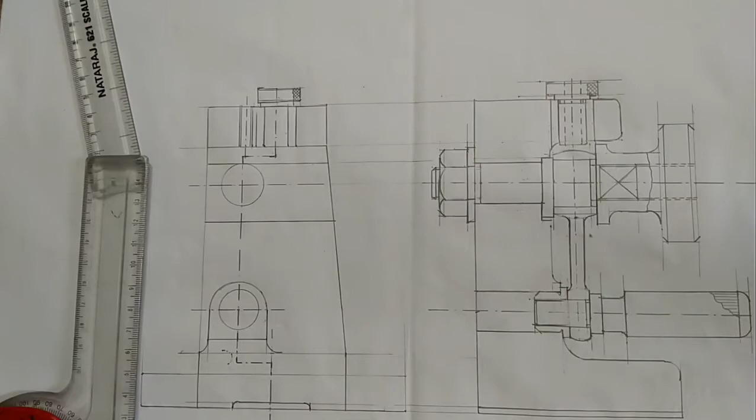Next, I am going to insert part number 9 in this hole. So we know that this threaded portion is M6, 6 mm diameter. Here also you can see M6. So we can insert up to this point in this hole. So the total distance was given 10 mm. I am marking 10 mm here.

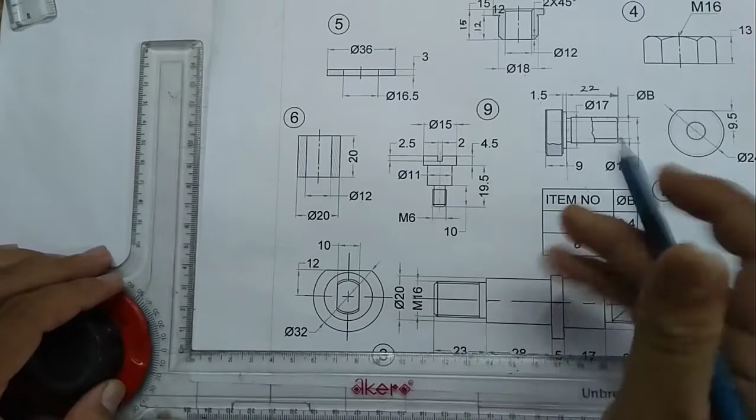So here you can see a line, the distance was not given. So I am choosing my own. Next, from this to this end, the height was given 19.5. 19.5, it's coming here. And this distance was given 11. So marking 5.5, 5.5.

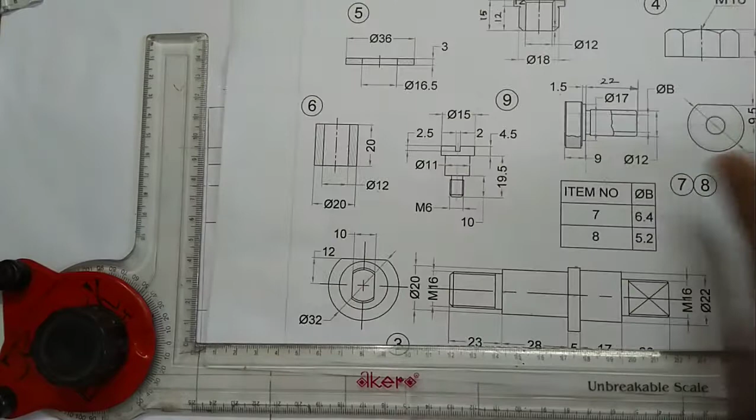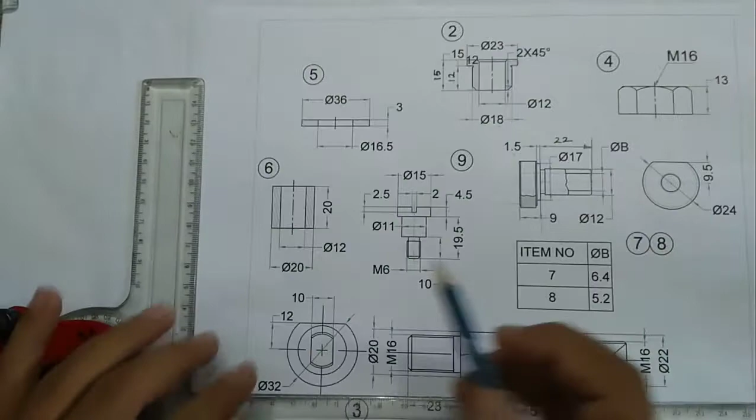Then this head, the thickness of this head is 4.5 mm. And the diameter of head is 15 mm. From here I am marking 7.5. And from here 7.5.

You can see a cut here. The gap is 2 mm. And the depth is 2.5 mm. So that's all, we have completed these parts. And the next thing is you have to assemble the job. This one is the job.

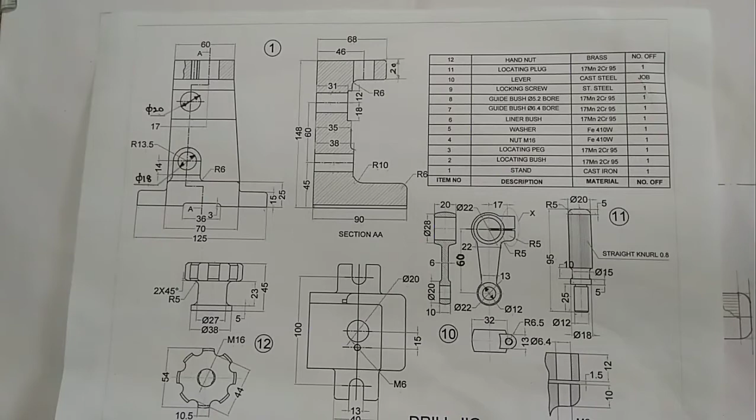Then the inner circle diameter is 22. So I am using pro circle. This one is a 20 mm diameter circle and this one is a 22 mm diameter circle.

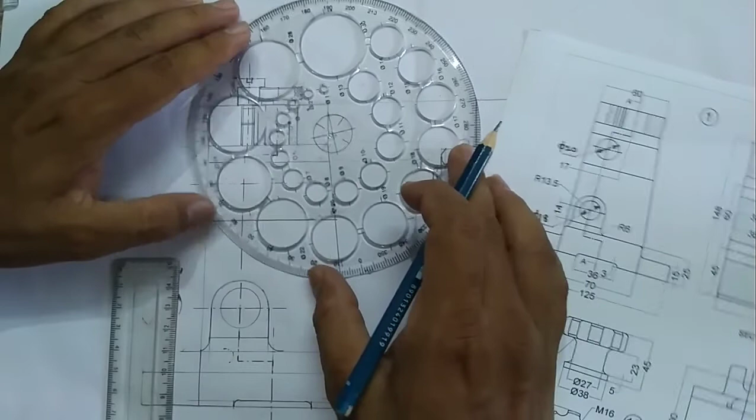Next we have to draw this outer circle whose diameter was given here 32. Measure 16 mm and draw the outer circle.

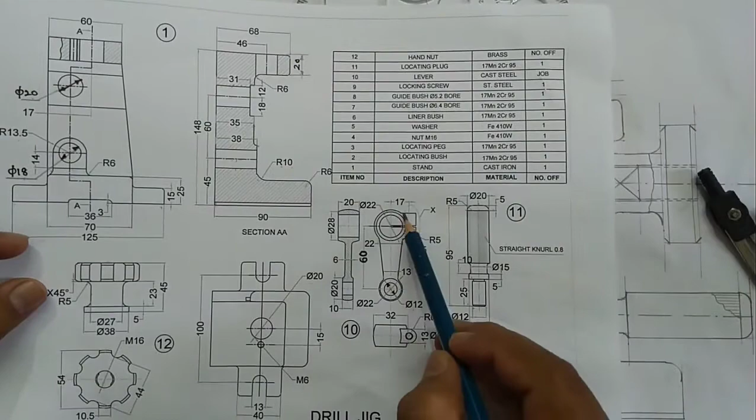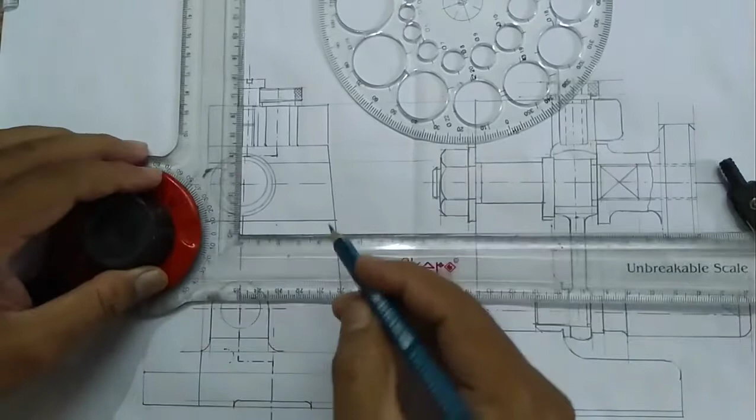Then this line I am going to draw. Before that I am going to draw the center line. So here you can see the center line. The gap between these two center lines is 17 mm. So this center line will exactly match with this one. And here you can see two small lines. The gap between these two small lines was given. This diagram is completely given here, zoomed.

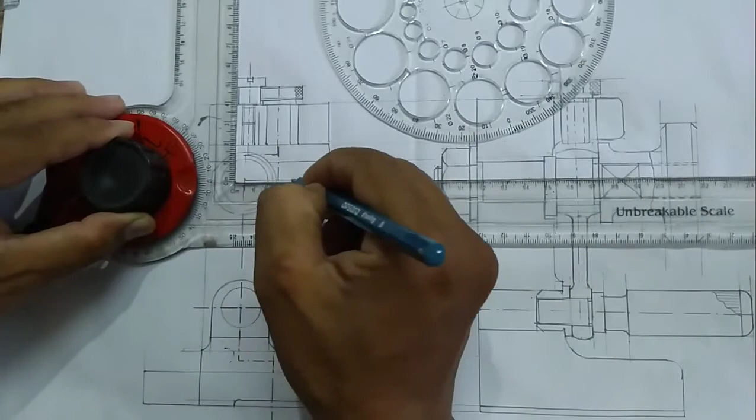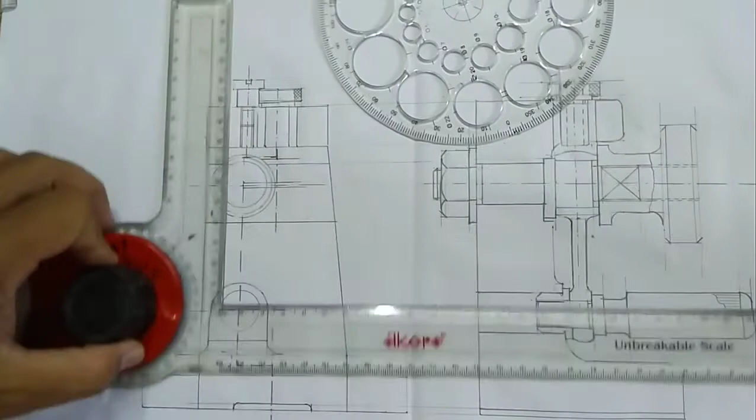And from this line the height is 12 mm. And this end of the line is 10 mm below this line.

And here you can see I have to find this distance, the distance between the center line and this edge. For that I have to use the top view. The radius of this outer circle was given 6.5, which means this distance will be 6.5.

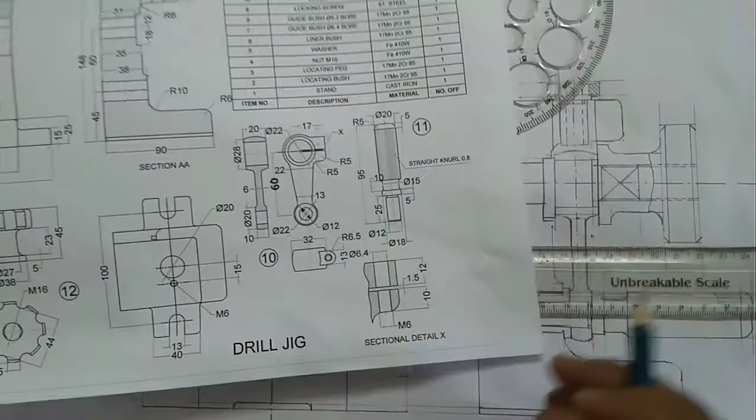The next one, I am going to put a hole. This hole diameter is 6.4. So I have to draw 3.2. You can draw for 3 mm.

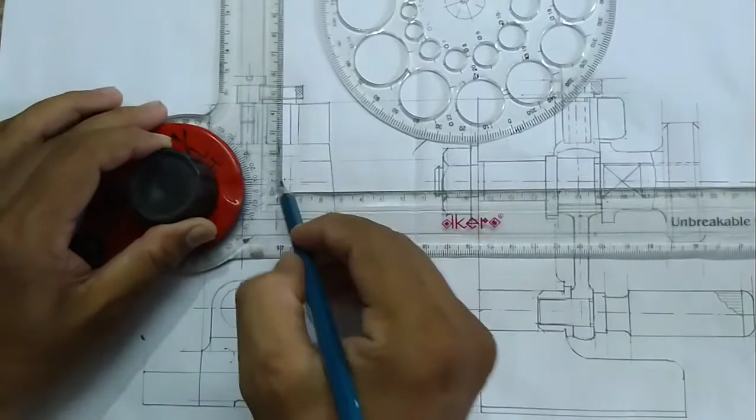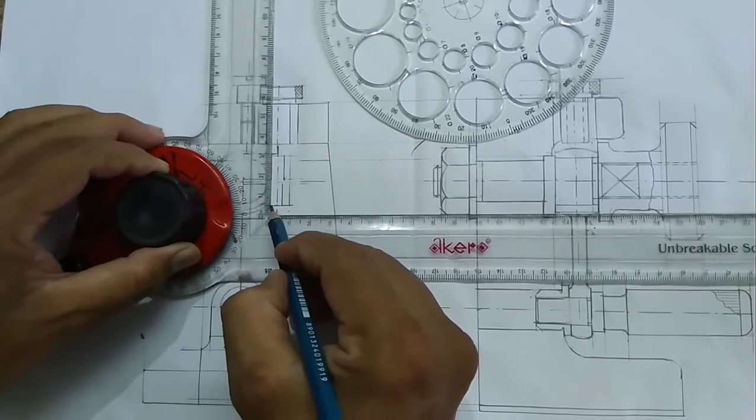So this distance is 6.4. And you can see another hole of major diameter 6 mm. This one is a threaded one. So in order to indicate thread, you have to draw another line. Just leave 0.5 mm gap.

Here you can see a fillet of radius R5. For R5 you have to use 10 mm diameter circle.

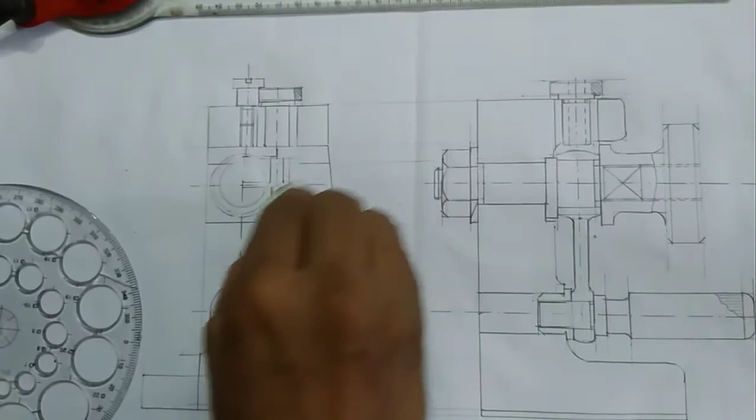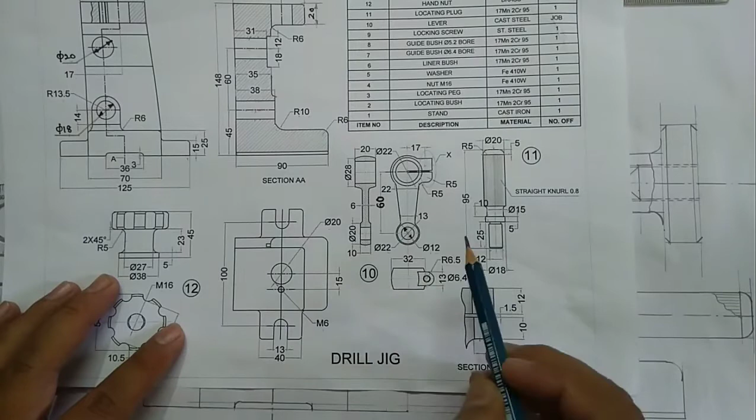Next I am going to draw the bottom portion of this job. Here you can see 3 circles. One is of diameter 12, another is of diameter 22, and the third circle is of diameter 20. So 12, 20, 22. So I am going to use pro circle. First I am drawing the 12 mm diameter circle. 12 mm.

Then 20. This one is the 20 mm diameter circle. Then 22.

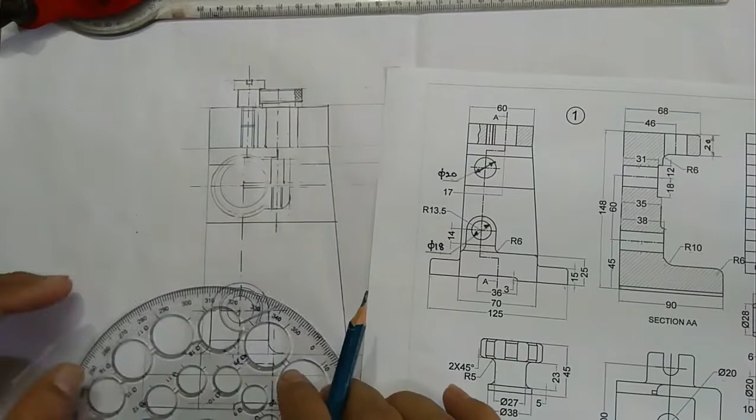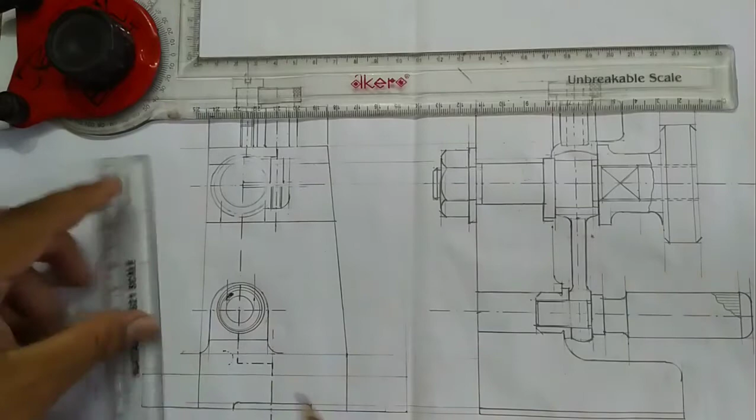Here the bottom end is 13 mm gap. So split into 6.5, 6.5. So this distance is 13 mm. I just draw 2 lines. Similarly here you can see this gap is 22 mm. 11, 11, total 22. Join the lines.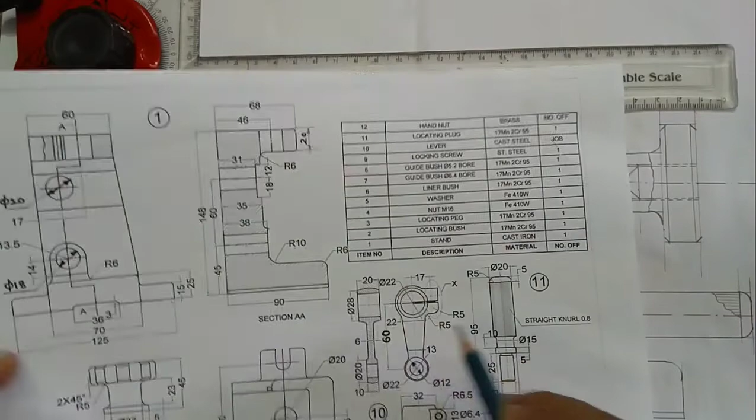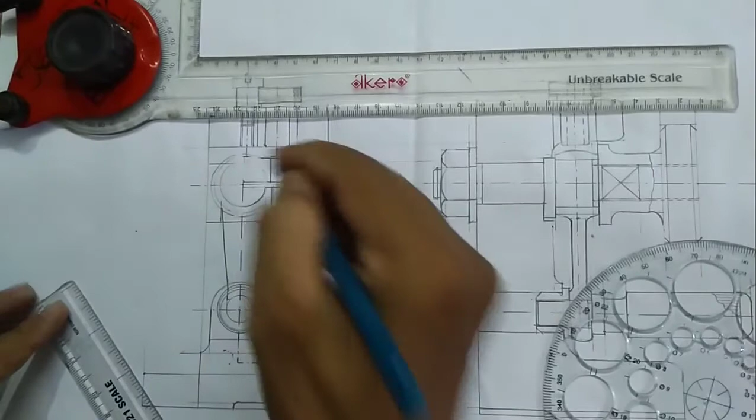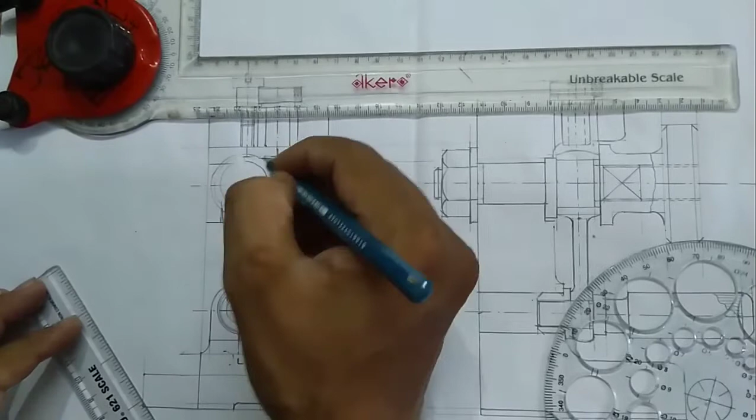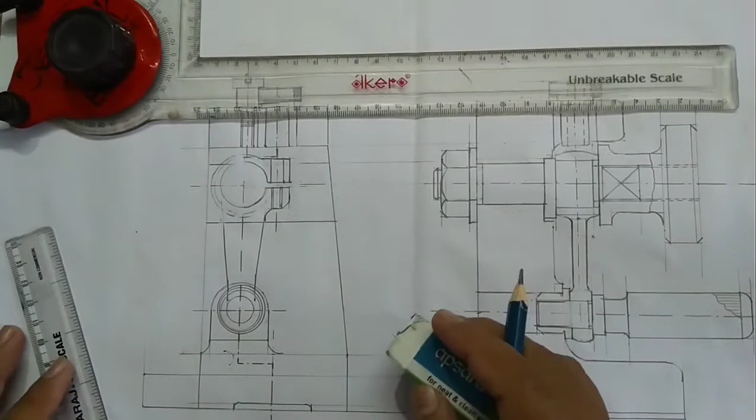And here also you can see a fillet of radius 5. Here also they are using fillet.

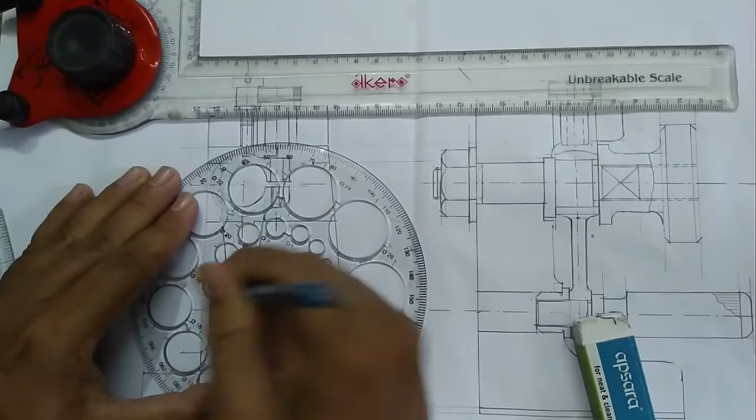So this is enough. You have assembled part number 10, job. Next I have to draw this part number 12, hand nut. So I am going to draw this hand nut only in the left side of this section line. I am going to suppress it on the right side. That means I have to draw only this portion. Only the left half portion I am going to draw.

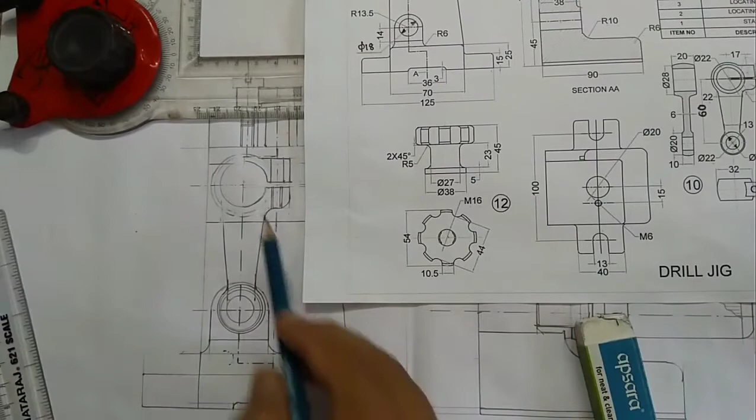If I draw this one full, you cannot see this job clearly. So I am going to suppress this on the right side. Hand nut I am going to draw only in the left side. You can see this major diameter is 54 mm. So in order to avoid confusion, I am going to erase some portion here. So 54 means measure 27.

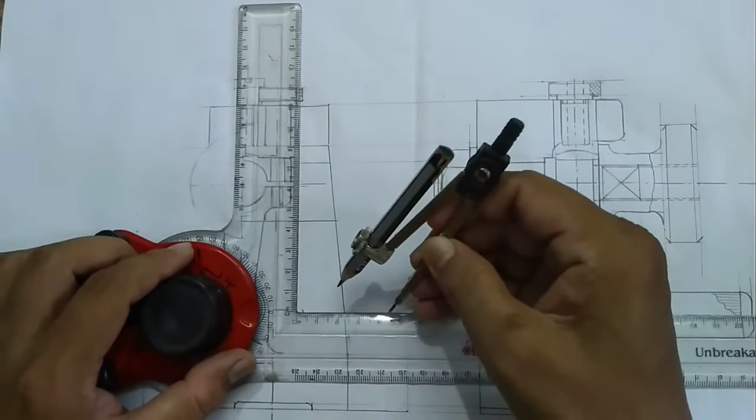The next thing I have to draw is this hole, but before that I have to draw these points. The gap between these 2 points is 44 mm. So I am going to draw a semicircle in order to get these end points. For that I have to take a radius half of 44, 22. So measure 22.

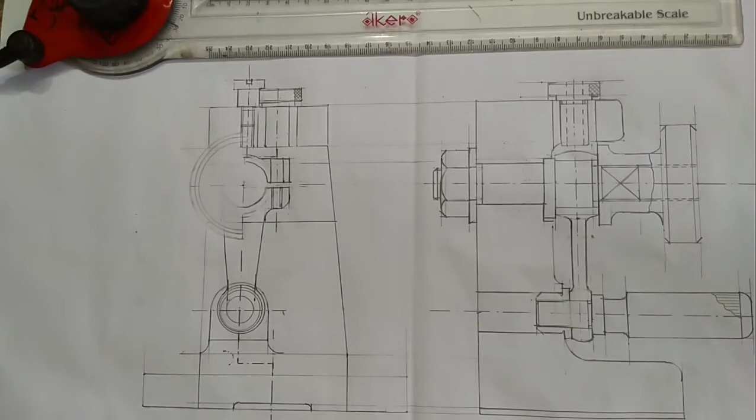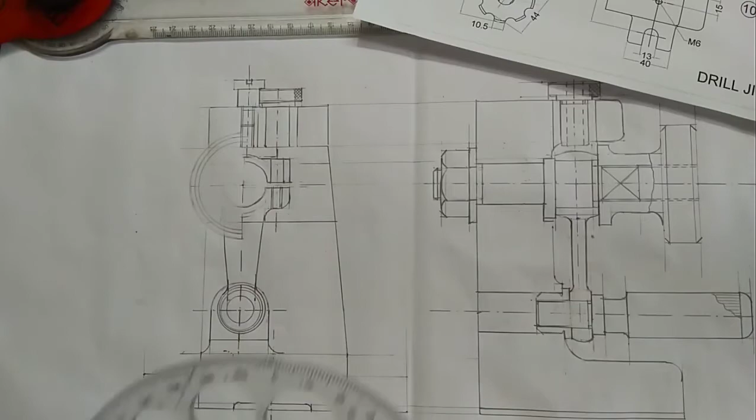Then this circle I have to draw. Major diameter is 16 mm. For that I am going to use the pro circle. So this is the 16 mm circle. Here there is an inner circle to indicate the thread. So for that you reduce just 1 mm. Use a 14 mm diameter circle.

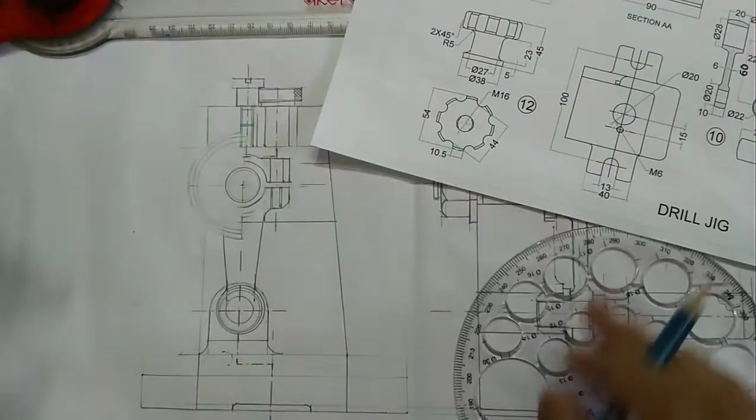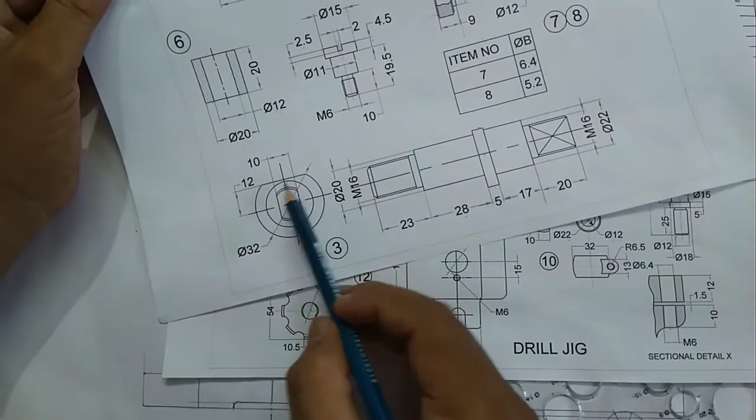Here in this portion you can see the thread, so that we can insert the nut easily on this threaded shaft. In order to insert this knob easily, here you can see the threaded portion in this gap. The gap is 10 mm. Five.

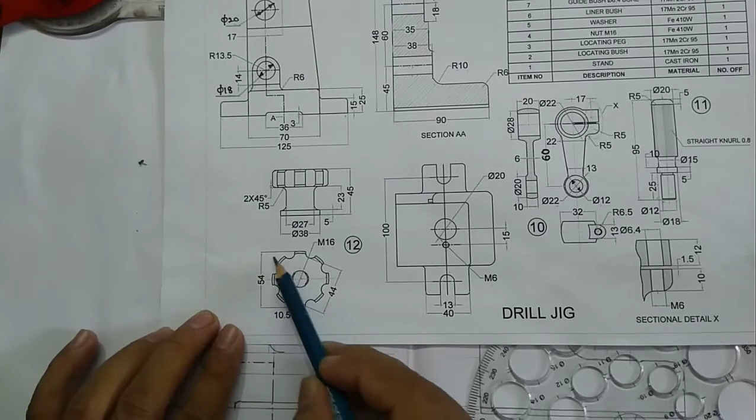And next one, here there are totally eight pieces, so I have to array this. For that I have to keep an angle of 45 degree. From this to this point the angle is 45 degree. So use protractor and mark 45 degree. This side also 45 degree.

Here you can see this thickness is 10.5. I can assume it as 10. So 5, 5.

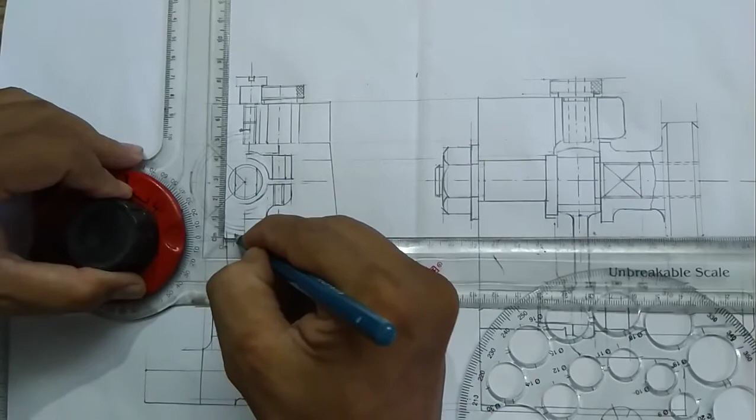Rotate your drafter to 45 degree and mark the distance 10.5. The distance between these 2 points is 10.5. From this point 5, from this side 5.

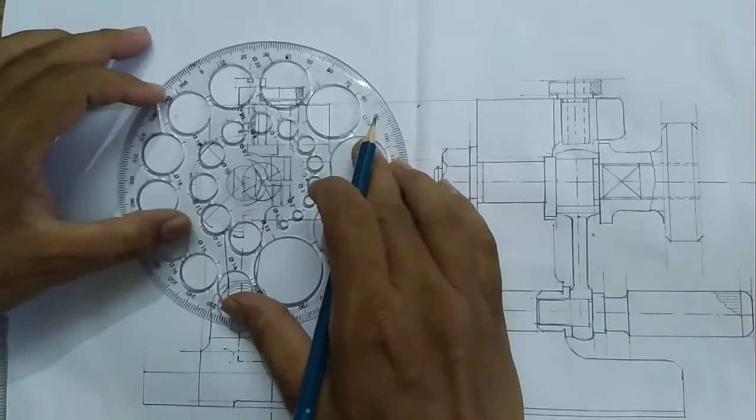Then I have to connect these points with a pro circle. Choose a suitable circle. This arc should touch these 2 points and also the bottom circle. This circle was drawn at a radius of 22 mm.

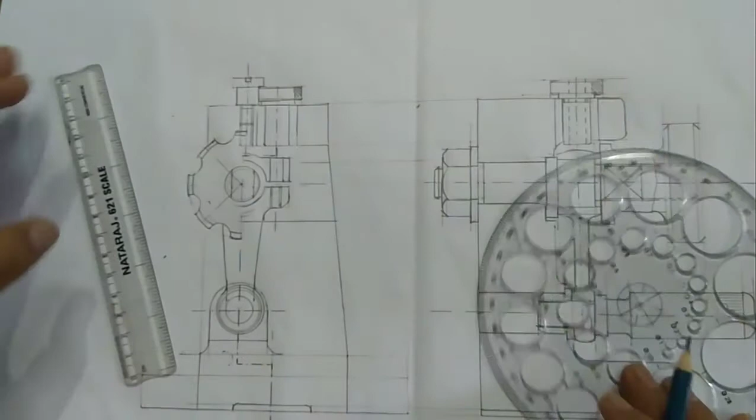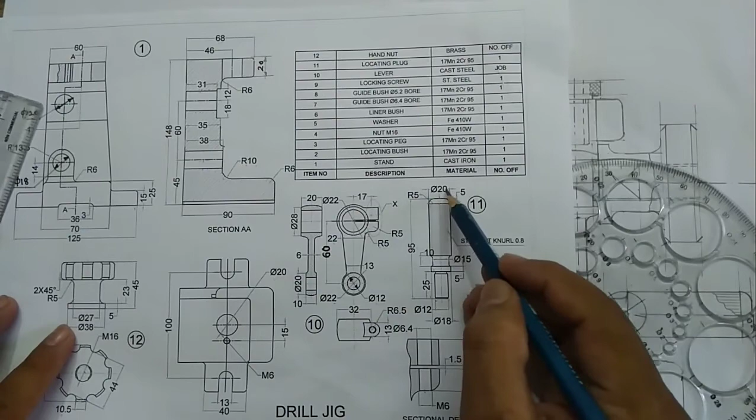So that's all. I have completed the hand nut. The last thing is I have to insert this one, part number 11, locating plug here. So if I insert this locating plug here, I can get a circle in the side view of diameter 20 mm. So here there are circles of diameter 20 mm, so no need to draw that one. So this one is the 20 mm. So you can see we already have a circle of diameter 20 mm, so no need to draw that one.

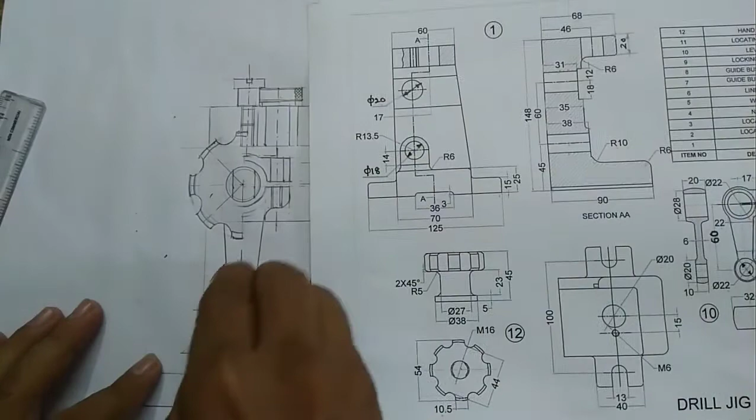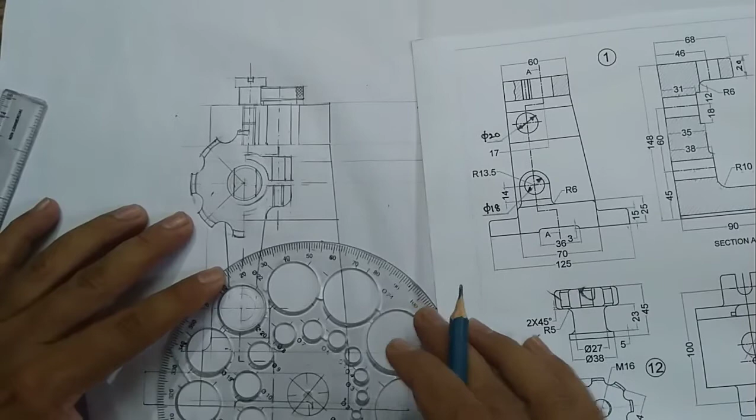I am going to show this plug only on the left side of this section line, because if I show it on the right side also, we can't see this job clearly. So in order to avoid that, I am just drawing the plug only on the left side. This one is a plug of diameter 20 mm. This circle is 22 mm. You can see the outer circle is 22 mm.

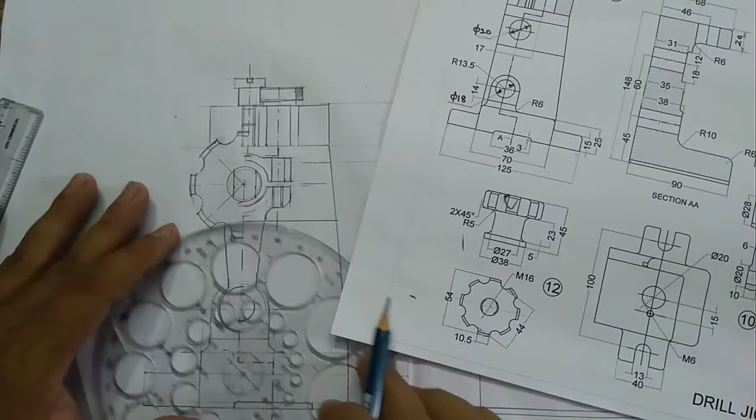Here you can see the inner circle, 12 mm diameter. And another circle, 20 mm diameter. And the 22 mm diameter circle.

So that's all. After that I have to project this portion here. This hand nut is incomplete. So in order to complete that I have to project lines from the side view. From this corner I have to draw a line, and from this point

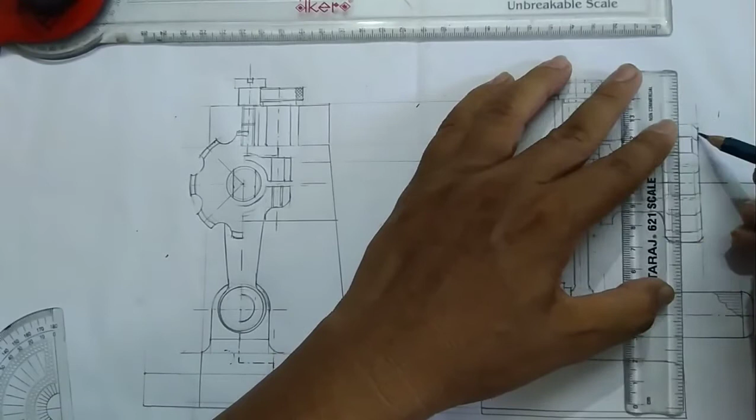Here you can see fillet on these two portions. The fillet radius was not given, so I'm going to use 3 mm radius.

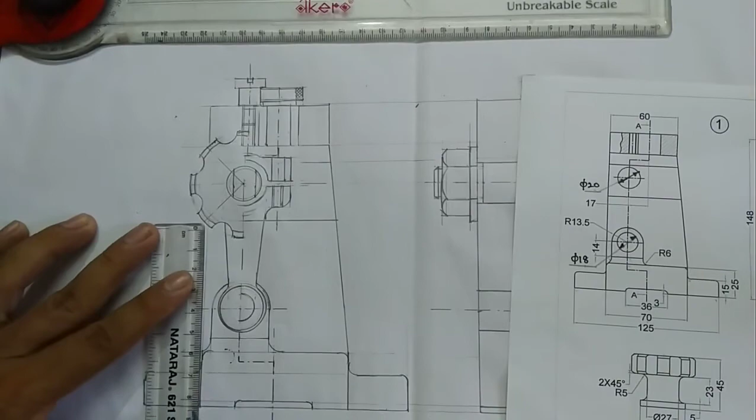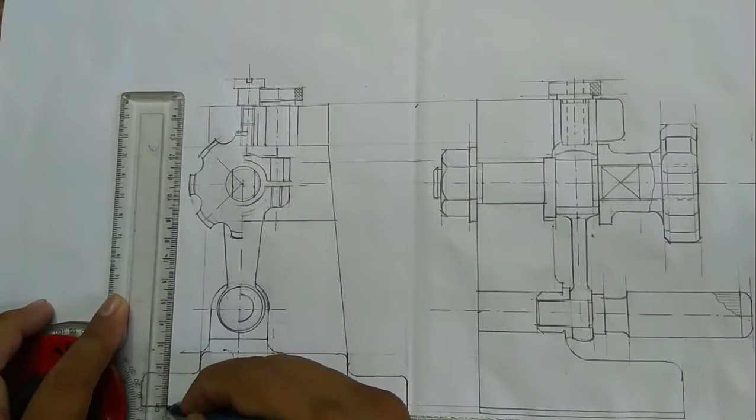Here there is a cut, so you have to mark this cut. Before that I have to mark this center line on this side view. So the gap between these two center lines is 100 mm. So 50, total, you will get 100. Draw the center line first.

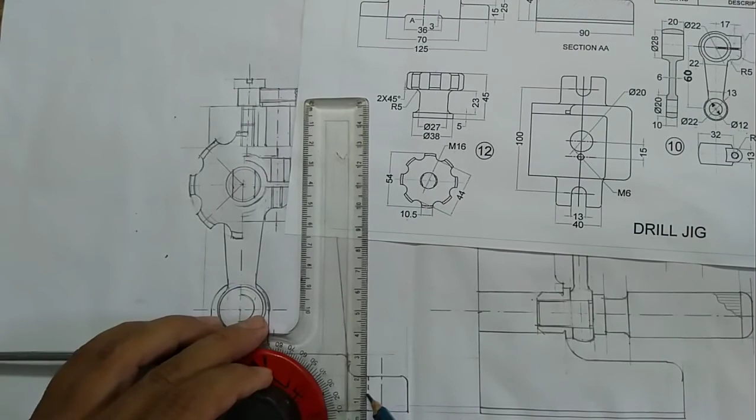Then this gap is given 13 mm, so half of it is 6.5, so this distance will be 6.5, and this distance will also be 6.5. From here you measure 6.5 mm and draw dashed lines. 5, 5, 6, 6.5. So with this we have completed the side view.